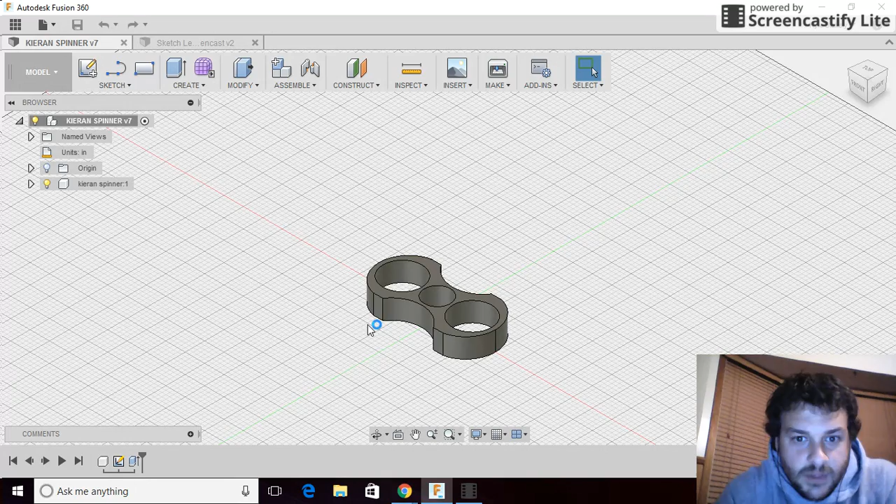All right, so this screencast is about our first attempt as a class project to make a spinner. So this is a handheld fidget toy. Kids were given a specific set of guidelines they had to follow. The stock that they were given is maximum 3 inches long, maximum 1.5 inches wide, and it is 1/2 inch thick. So this student drawing is a spinner they've created.

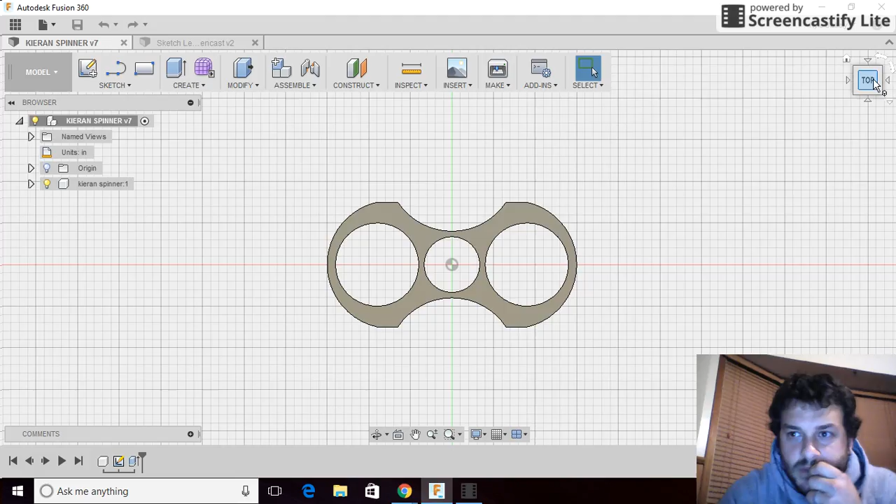The next major part of the criteria is this center bore is just slightly under 17 millimeters. That way it can be warmed up if needed and expanded so that we can press fit a ball bearing in, and then students will be able to hold the toy in their hand and spin it. So since the student's already got a 3D model made, the next step to do is to set up all the CAM operations so that we can machine it in the Tormach mill.

So if we switch from the model browser to CAM, we already have a whole bunch of different operations created. Once we're in CAM, I kind of like to start looking at things from the isometric view. So if you click on the little home button, it gives you a better perspective view of what you're working with, and it really helps once tools come into play.

So first thing you've got to do is a new setup. I'm not going to click on it because I've already got one created for this project, and we've got a list of tools that are available on top of the red toolbox right beside the CNC. So all you got to do is just double check with me what tool number is what, so that we make sure we use the right tools when setting up the machine.

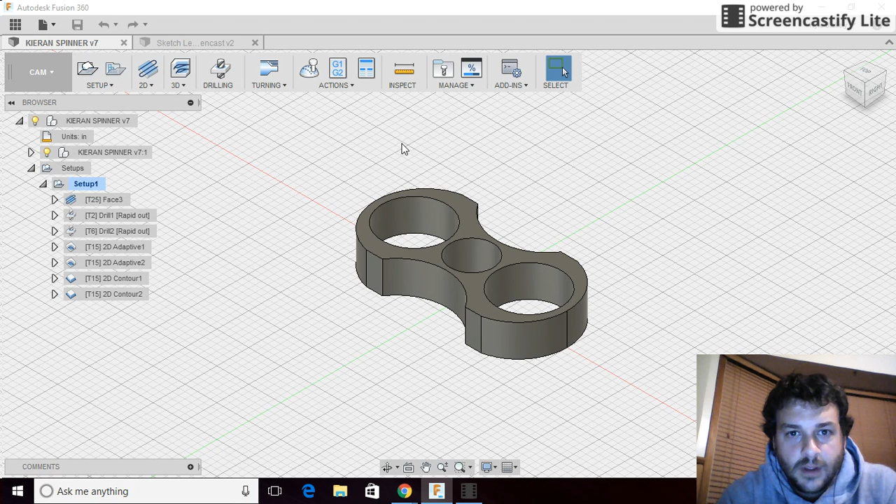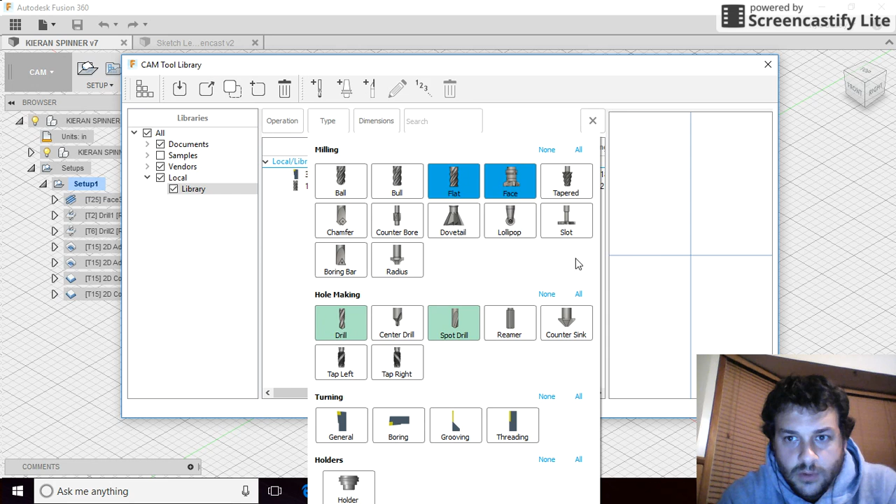So if ever you want to know or want to look around, if you click on the tool library tab and you highlight local library, you can choose the different types of tools that we normally have. So we have flat mills, face mills, spot drills, and then we can scroll down and look at different tools that are available from our school's tool library.

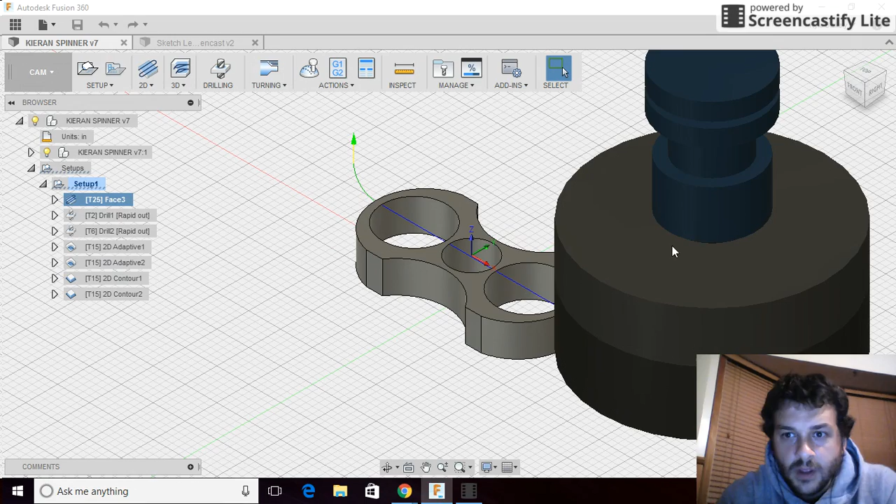And if we scroll through all of these different functions, we can look at what we chose to get this job done. So first things first, it looks a little bit silly, but it's a roughly modeled Tormach Superfly. So that's the Tormach tool holder and fly cutter. So what we choose when we do this, if I open up edit for you to look at, is the tabs always go in order. So whenever you choose a new operation, it's always the tool, then the geometry you want to machine, then the heights tab, and the passes and linking.

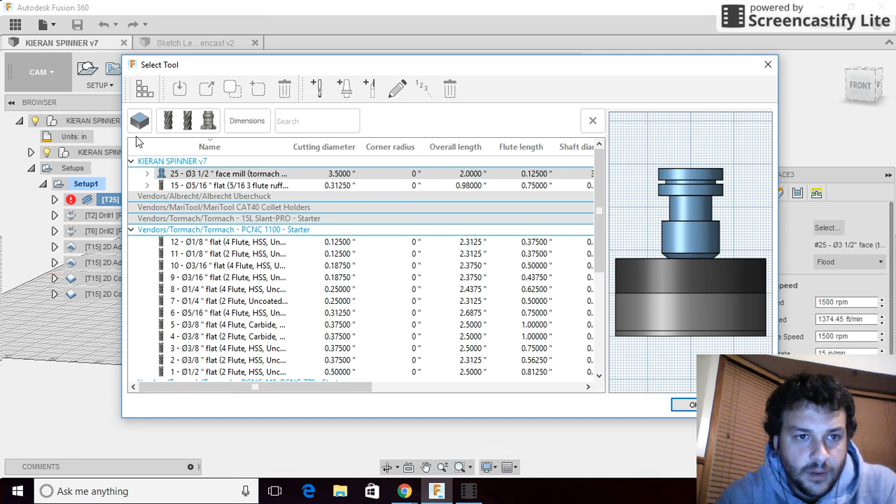So tool, you hit the select button, come on over, you have all the options that are available to us. So tool number 25 is what we've got. Our geometry is the size of the stock that we're using, 3 by 1.5 inches.

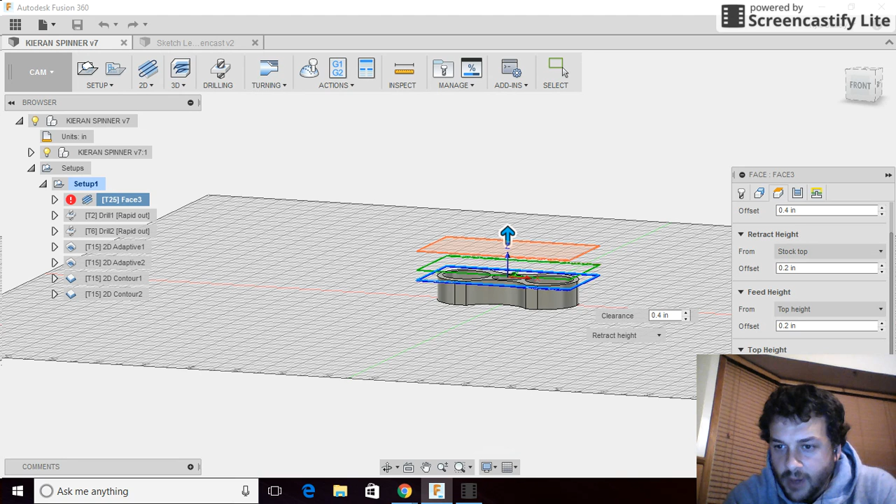And then for our heights, I left everything in its normal position just because I know that it's safe and it works well. And we've got the clearance height, the retract height, the feed height, and then for what actually gets machined, you have the top height, which is the top of the stock, and the bottom height is the model top, but I've got it offset down 20 thou. That way it'll come down and make a very slight cut. Turn on our stock and face that top off.

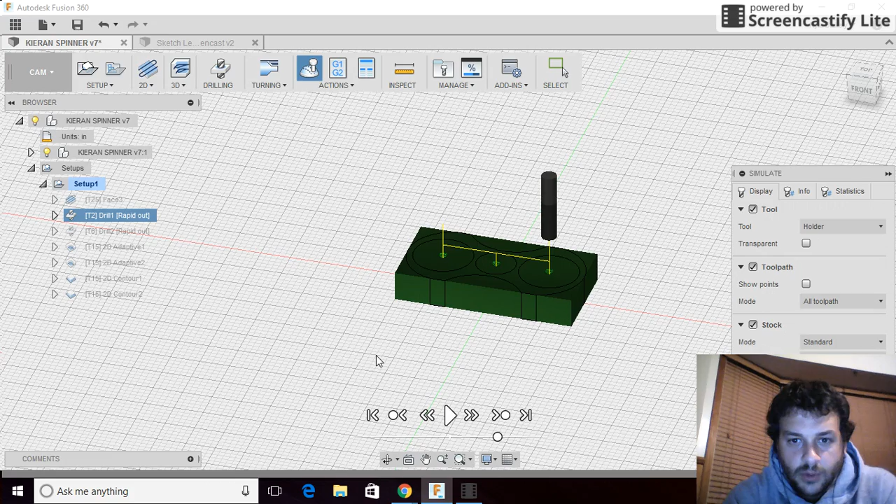Next past that, most of you guys in the class have seen this already, we've got a spot drill routine. So if we click on simulate, it's our tool number 2. It's going to come down and spot drill all the holes. Past that, we've got a 1/4 inch drill, which is tool number 6. And so this will go through and drill all the way through the part.

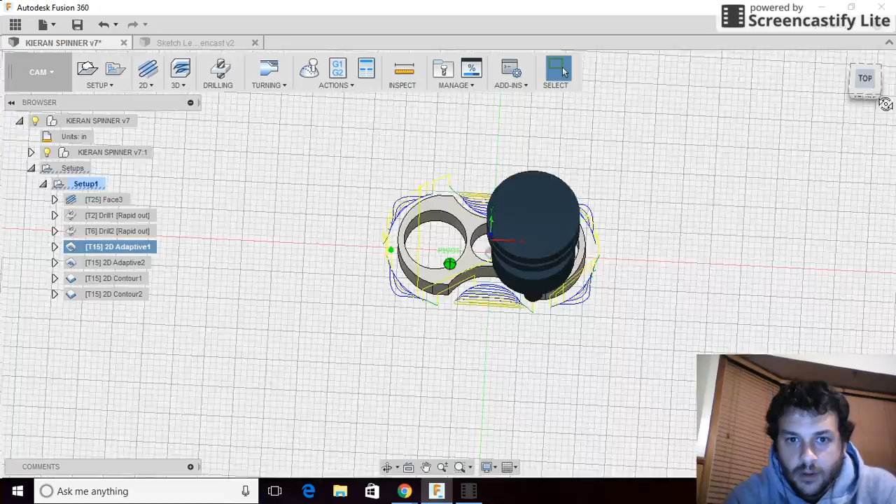That way, when we start using our 2D adaptive strategy, we don't have to worry about the cutter coming down and coming in contact with the hole and having to plunge really slowly. So our first 2D adaptive is around the outside of the part. However, if you look from the front view, you'll see that it stops 100 thousandths of an inch from the bottom. That's because that's the material that's being held in the vise.

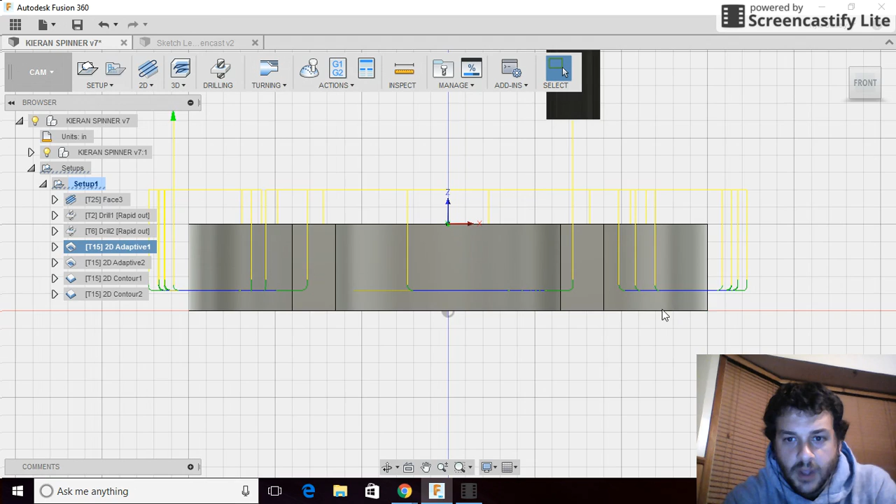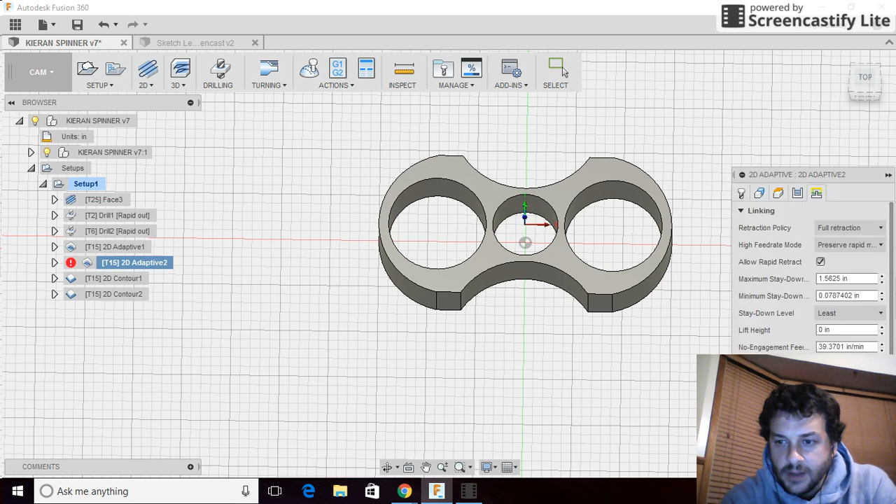Our second 2D adaptive strategy is these pocketing operations. The only thing I did different with this that had to be modified from the stock options is I changed the helical ramp diameter to 0.2 from the stock, which is almost 0.3. And the reason why I did that is because the center diameter of this hole being 17 millimeters, slightly under, and this tool being around 6 or 7 millimeters.

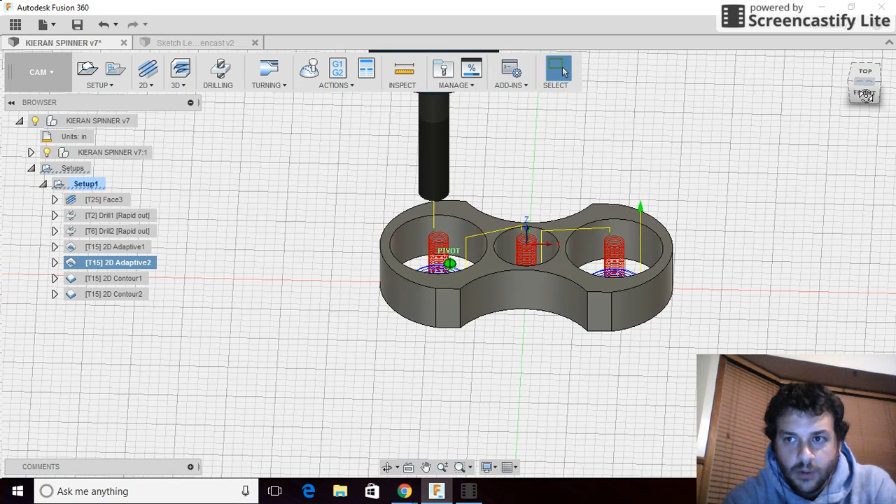It's actually the 5/16 cutter. I had to tighten up the circle that the tool drops down into. That way the cutter would lower into it. Otherwise, I use pretty much all the stock operations. One other thing I'll show you guys, whenever you start setting up any of your own tool paths, is the optimal load for tool number 15 is 50 thou.

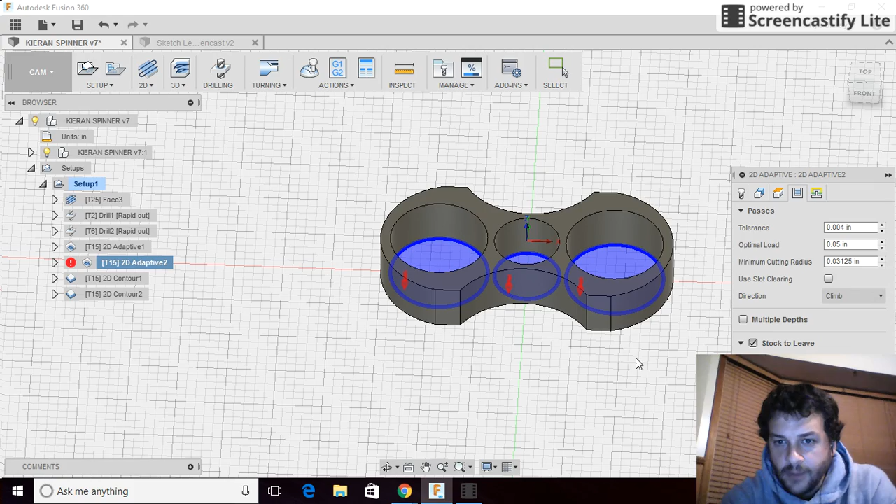So keep an eye on that, because that will control how much width of cut the cutter takes. And since in a case like this, we're going full depth of cut, we want to ease up on width of cut a bit so it's not too hard on the tool. Then 2D contour will go in and clean up all the holes. And then an outside contour will go and clean up the outside.

These 4 flats are what we're going to use when we flip the part over in the vise, because we'll have material left on the bottom. And then we'll be able to dial indicate the center of this hole in order to find our XY 0. And we can touch the top of the stock to find our Z0, and then finish contouring and facing the rest of the material off.

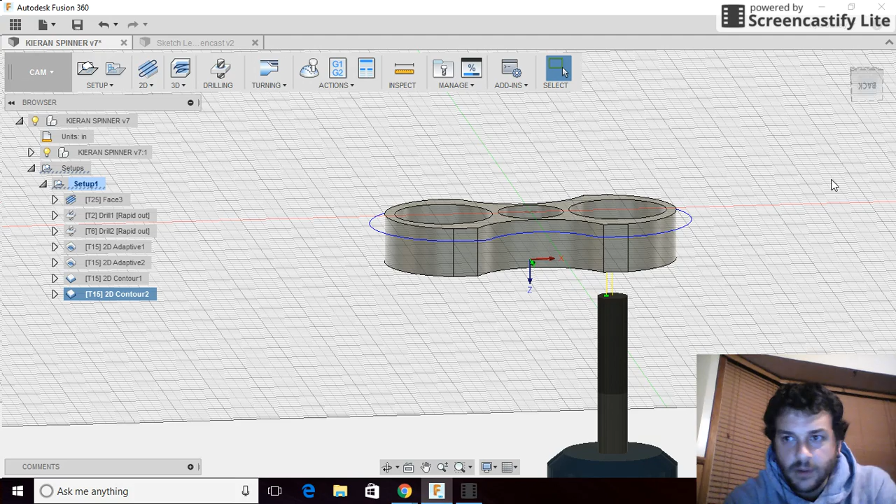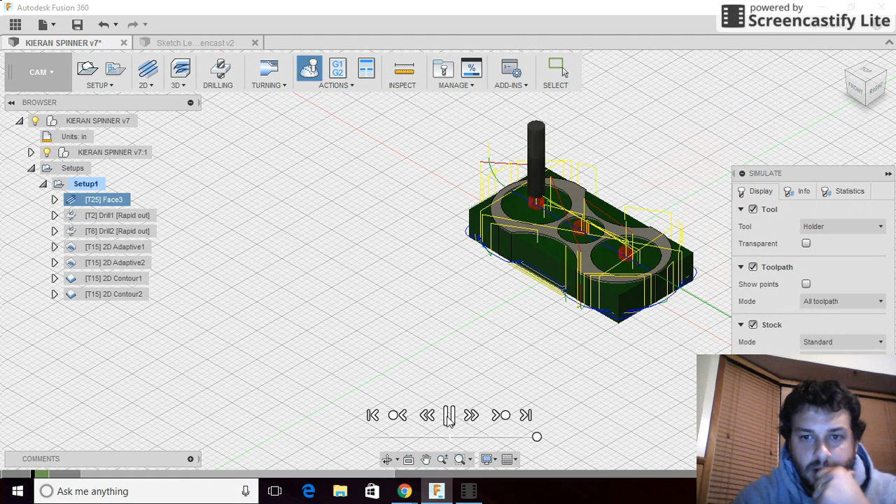So if we just flip this back around, bring it to the home position, the last step you guys should know is that if you click on setup, you see your stock and where we have to do our setup from. So our work coordinate system is going to be from the center of the stock. And if you hit actions, you speed this up a bit, you can see how the tool comes around and will clear out all the material. That was a little bit quick.

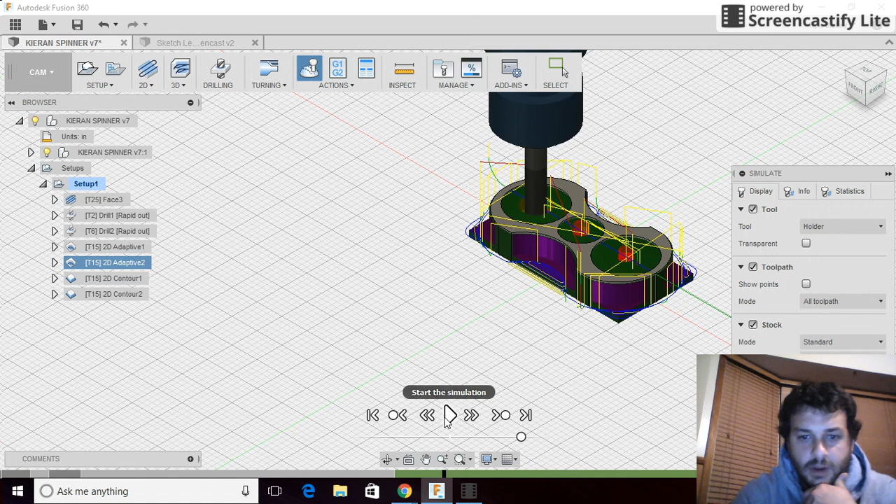One thing to note, and I'll pause it when we get there, for the first 2 2D adaptive operations, the one that's going on right now and inside those pockets, I have 20 thou stock left around the outside of the part. That way there's material for the 2D contour to go around and clean up and make for a really nice surface finish. So this will go through and remove the majority of the material. And then the contouring operations, which are the last passes, they just go around and clean everything up.

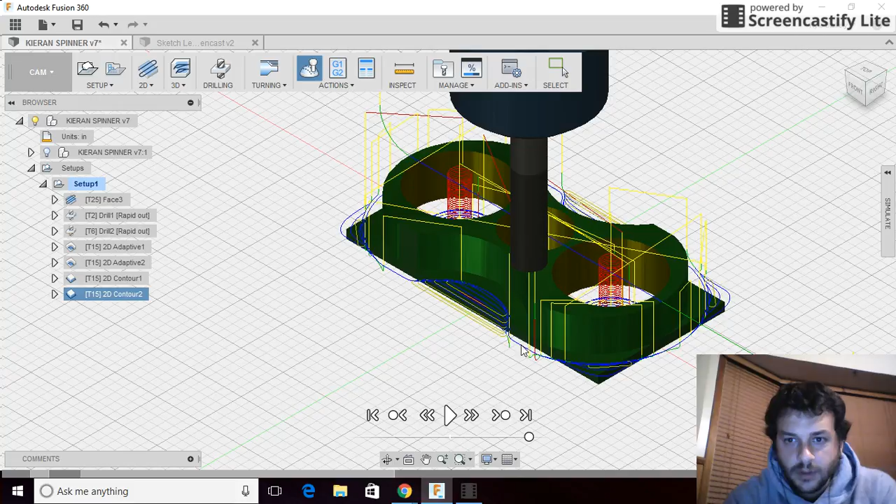So even if you hide the actual model, what you're left with is an idea of what the actual finished machined part will look like. So that's what we've got right there. All right. So we'll have this going in class tomorrow, and then as we work our way through, the rest of you guys can get started on making your own CAD models of a mini hand spinner.